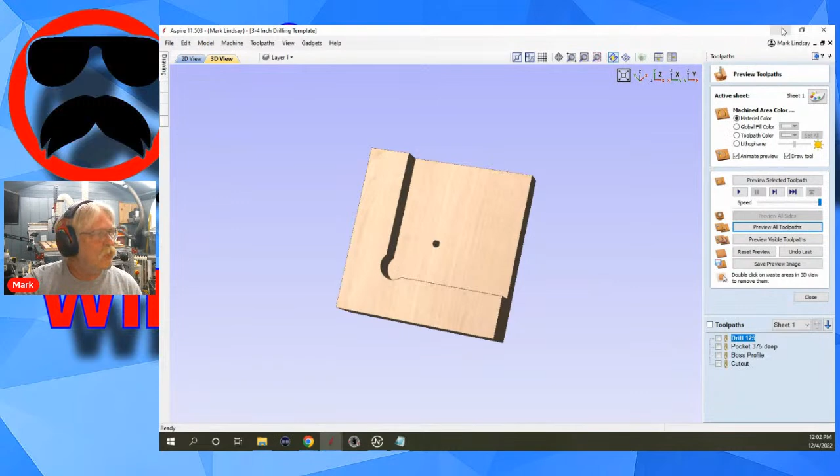It is a total of 4 vectors. So let's go ahead over here into a new session of Aspire, and I based this on the piece of scrap MDF that I had. This is 6 inches by 6 inches, and everything worked out okay. You can use any size that you want. The first thing I'm going to do is create a rectangle for my outside profile, and anchor the center of that at my X and Y zero, which is in the center of the material.

I want square corners, and I'm going to make it 3 inches by 3 inches. I'll go ahead and create that.

Then I'm going to create 2 more rectangles. I'll start it up here at this corner, and just roughly guesstimate the width and bring it down to this bottom edge. I'm going to adjust this - let's make it the width of it, 3/4 of an inch, so 0.75. I'll click apply. I want to anchor that to the bottom left corner right here, and click apply. Then I'm going to draw another rectangle horizontally right here - this is for that little boss that helps me seat this corner jig. I'll do the same thing, anchor it at the same point, and make that 0.75, click apply. Then I'll close that.

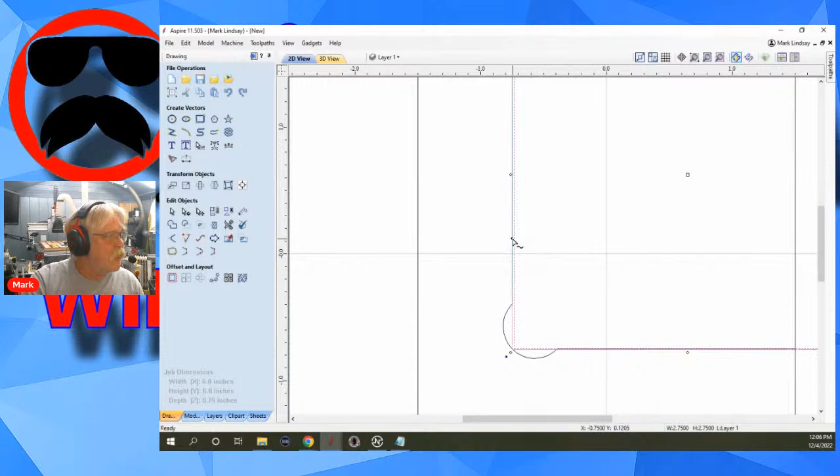Then I need to move it. So we'll go ahead and click it again to go into move and transform mode. And I'm just going to slide it over here so that that's even with that boss. Then I'll come down here, slide it up so it's even with that edge of the boss. I got a little bit off here. Let's scoot it over. There we go. Yeah, let's get real picky. Let's go up right here. There we go. Now we're set.

All right, now I need to draw a guide, a vertical and a horizontal guide, just so I know where to put my 1/8 inch diameter hole. I'm going to drill a hole here, which will be the actual drilling guide hole that you can see right there.

So I'll pull a guide over here and pull a horizontal guide right here. Now, the easiest way I have found to adjust the position of these guides is to right click, and I have a current position of -0.75.

Without doing a lot of math, let's just let the built-in calculators do it. I want this guide to be 3/4 of an inch above that boss. So here on my keyboard, I'll go plus 0.75 equals, that's my new position, it just happens to be 0. Close that, and I'll come over to the vertical guide and do the same thing. Plus 0.75 equals, click apply, close, and now this intersection is 3/4 of an inch above this edge of this boss here, and 3/4 of an inch to the right of this boss here.

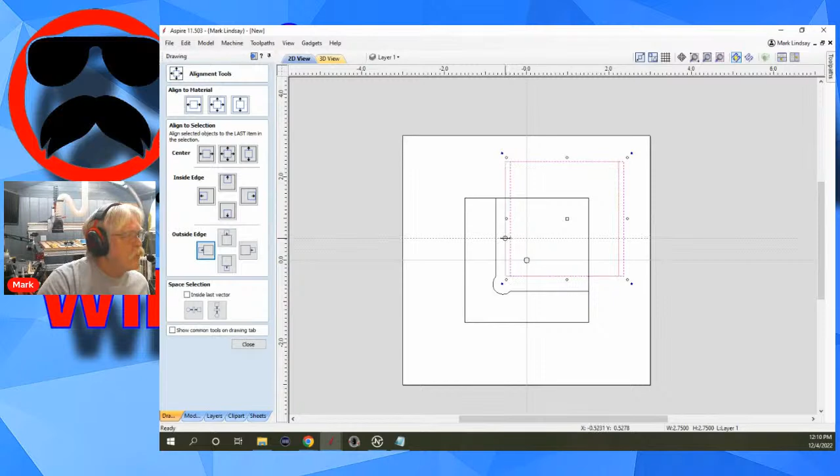Just turn on geometry snapping and it should snap right down if you're careful. Yes, that's going to go to the inside edge. That's why. It's going to come over here to this one. It's not going to come to this one. Well, hey, I tried. Not quick, but accurate. Exactly.

Exactly. Okay, let's go ahead and toolpath this. Now, it's only 4 vectors, but believe it or not, it does require a few different toolpaths here. I'm going to do a drilling toolpath for the 1/8 inch. I'm going to do that one first. I'm going to drill to the thickness of the material.

So I'll just type in Z equals because I don't remember how thick my material is. And I will select the bit. The bit I'm going to use is a 1/8 inch upcut end mill. And there is that. I'm not going to worry about peck drilling. It's a 1/8 inch straight in, straight out, done. Calculate, and there's my first toolpath.

Let's go back in here. Why am I not seeing it? Start depth, yes. Make sure I have the vector selected. Yes, I do. Okay, close. All right, then I'm going to come along and pocket this area out. And it's 3/4 inch material.

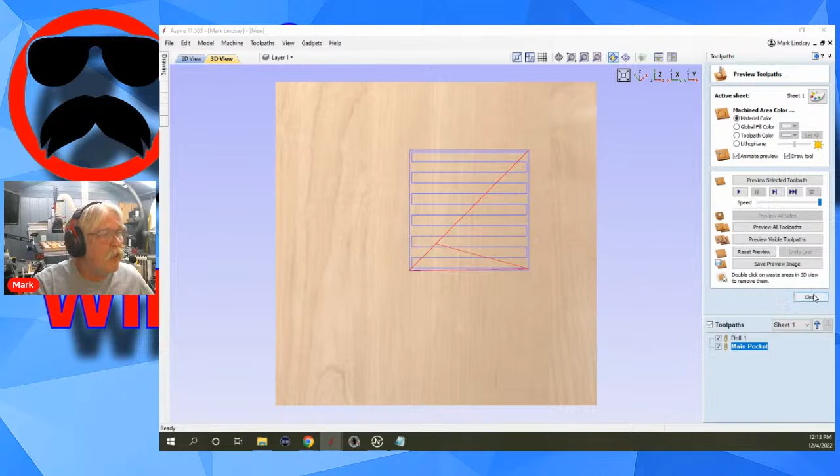Okay. I'll close that, go back over, now I want to do the boss. And this is where I just made a mistake. What I should have done was I should have put that boss on its own layer. So I have it selected now. Let me go ahead and move to layer, new layer. Let's call it boss. This is what I get for trying to hurry through this. I forget steps. And I'll make it blue. Okay. That way I can find the boss and not the outer border. I should have put the pocket on its own layer as well. I'll do that in a second.

I want to do a profile toolpath for this boss. So I just want it to carve around the inside and outside and make sure to get that little fillet in there. So I'll do a profile toolpath. Start depth is 0, but I only want it to carve down to the area this pocket has taken out. So that's 3/8 of an inch. So I will do 0.375. I'll use my 1/2 inch end mill again. Select and want to cut to the outside. I don't need to do a separate last pass. I'm not going to add tabs, but I am going to add a smooth ramp over a distance of an inch.

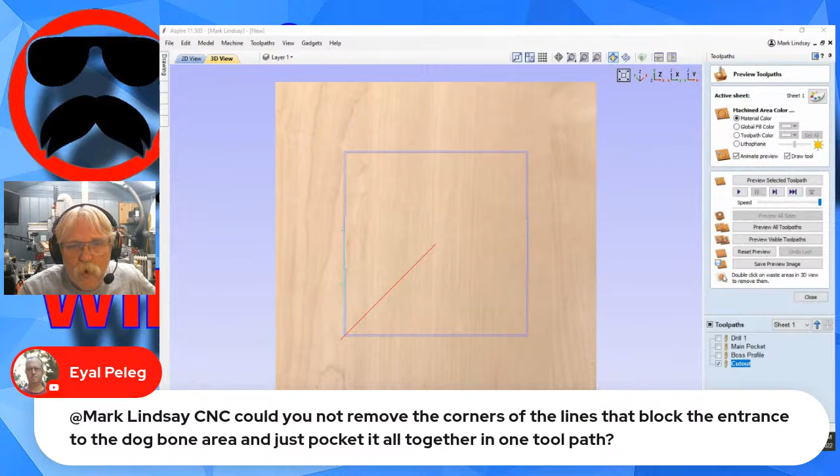Let's see here. Eyal says, could you not remove the corners of the lines that block the entrance to the dog bone area and just pocket it all together in one tool path? Probably could. Probably could. Sure. There's more than one way to skin the proverbial cat. So however you want to do it, go right ahead. This is just the way I did it.

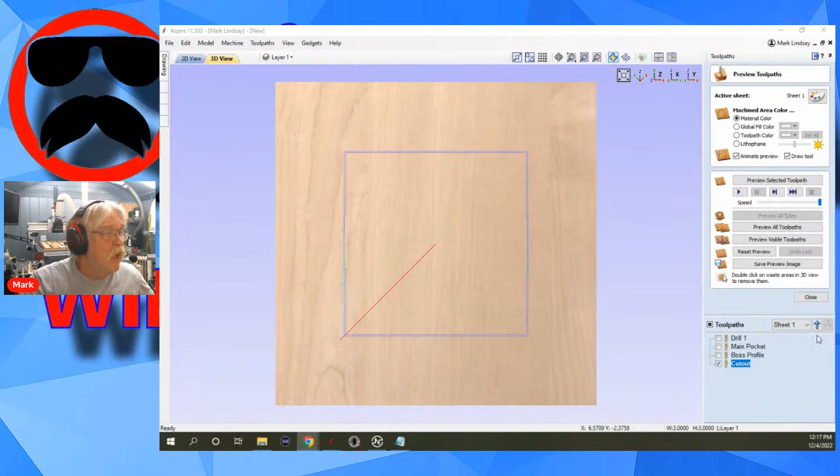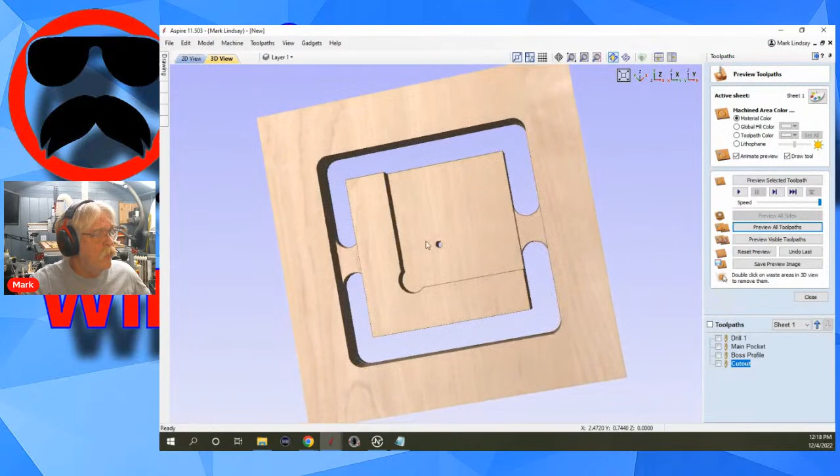So now we'll uncheck that, and I'm going to preview all of the tool paths. And there is the finished product. That's how I would cut it, machine it, and get the whole thing done. That's how I did cut it, machine it, and got the whole thing done. Without the tabs, it ends up looking like so. And here's the fun part about this. That just took me 18 minutes to explain everything, and it took less time than this. This says it's going to take 1 minute 10 seconds to cut. The actual machining time for this, not counting tool changes, was 55 seconds.

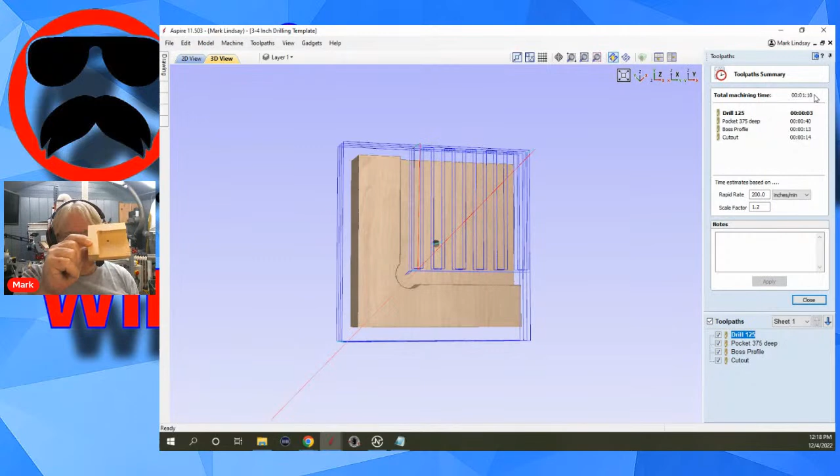Yeah, you could do this with a handheld router. Yeah, you could cut it on the table saw, but it is very quick, very easy. It took me longer to tell you how to do it than it did to actually do it. It's just one of those things. And I marked it. This is 3/4. I could make another one for 1/2 inch, put it in my jig drawer. And then when I need something, there it is. It's ready and raring to go.

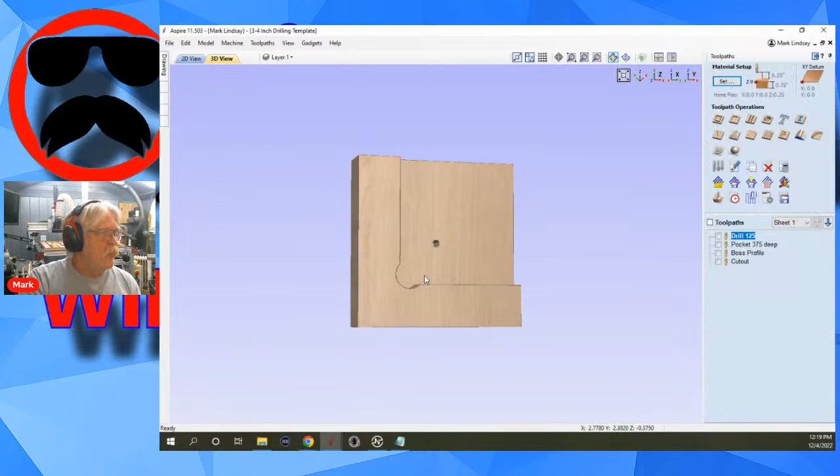So just a quick little easy project that you could do. If you have a large piece of MDF like this one, you could probably do 3 or 4 of them. Just lay out a bunch of them for different spacings.

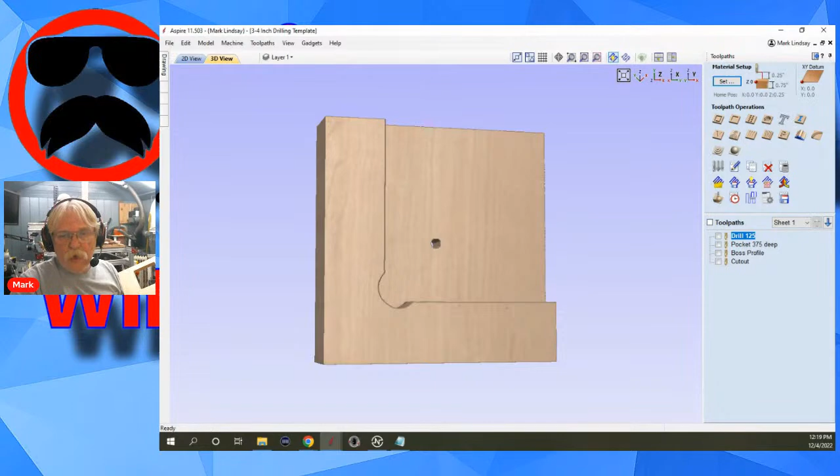Then when I need to use it, let me stop sharing here. When I need to use it, all I do is I take this side with that boss there, throw it right up against the corner like so, and start drilling. Put a drill stop on my drill bit, and then I go to the correct depth. Quick, easy little template, and ba-boom.

Eyal says you can make several holes in the same one. Yes, that's true. But I find that eventually these holes will start to wear. And if you get them too close together, like for instance, if you went 3/4 of an inch, then a 1/2 inch, remember the diameter of your hole, you're going to have two holes real close together. The probability is they're going to break through into one another.

So, for 55 seconds of cutting time, you can throw on a larger piece of scrap and cut 3 or 4 of them out for different distances if you wanted. And if you really wanted to get tricky, drill a hole out here and put them all on a chain or piece of twine or a zip tie for that matter. Just throw them all in the drawer. Then when you need one, you got them all together.

Templates and jigs are real easy to make. They're actually, I'll be honest, pretty satisfying simply because you get a lot of instant gratification out of it. Like I said, 55 seconds of work. There's no finishing involved. And when this thing wears out or the hole gets too big or what have you, make another one. So, that was an experiment in attempting to design something really fast live. And I'm glad it didn't go totally south.

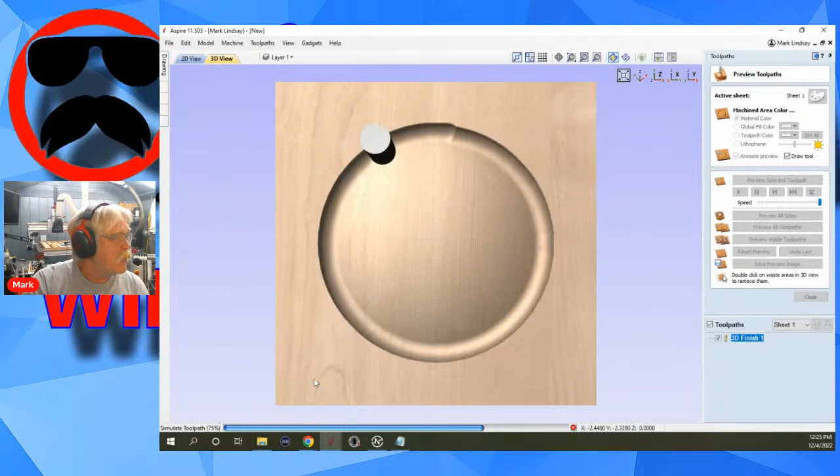When it comes time to actually do the text, okay, you'll do a V-carve toolpath, and I'm not going to use a flat depth. I will select a 60-degree V-bit. No, I won't either. I don't have one installed, and I don't want to take the time to install it. Let's use a 90-degree V-bit.

The thing to remember when you get down here: project the toolpath onto 3D model. That's the important part. If you don't put a check mark here, what VCarve is going to do is just air cut that text and not get all of it. Whatever happens to touch the top of the model is what'll touch the top of the model. But by putting a check mark there, you don't have to go with a start depth. You don't have to do anything. It knows to project this text down onto the shape of the 3D model.

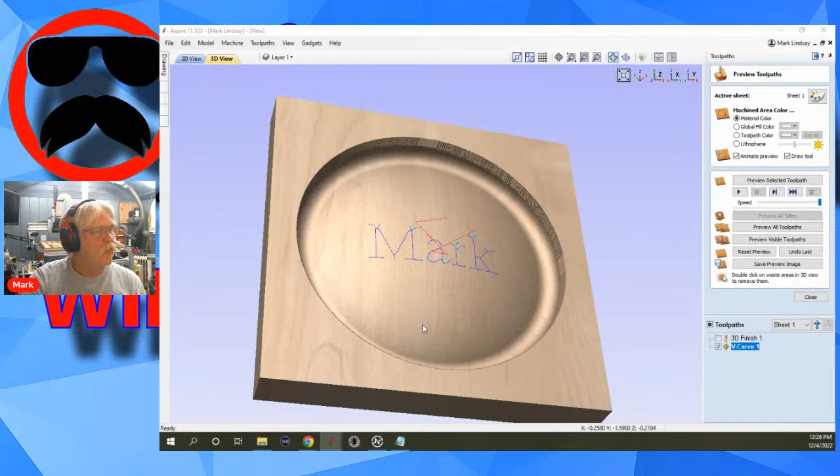So we'll click calculate, and we can see right here that that text toolpath is following the shape of that dome. So back out a little bit and we'll preview it, and there it is. So that's the important part right there, is that little check mark in project toolpath onto 3D model will make or break your project.

So, alrighty, and I hope that answered your question. Okay, it looks like I did answer your question. Okay, terrific, terrific. All right, let's see here. We had a couple of others. Michael Kelsey says, thank you for doing these. You're welcome. Thank you for joining us.

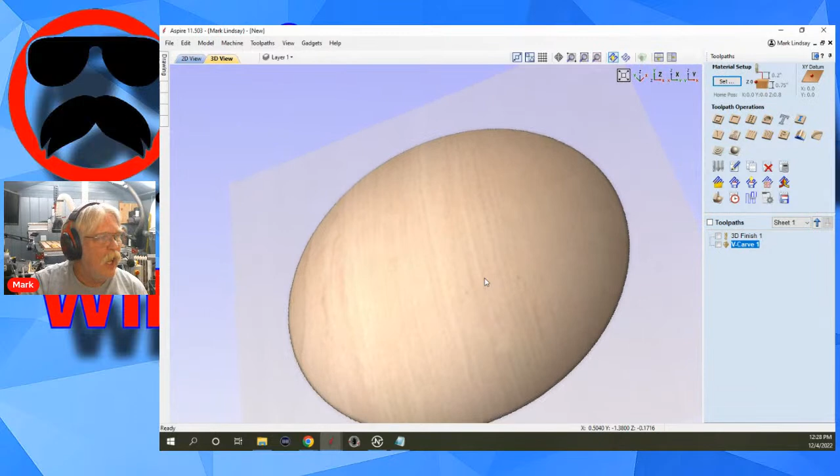When I calculate toolpaths for text in VCarve Pro 10.5, I often get paths with the bit moving back and forth across the work. How can I make the toolpath more efficient? Well, let me go back over here and just say that efficiency is in the eye of the beholder. And a lot of times, what looks like an inefficient toolpath to us isn't to the control system.

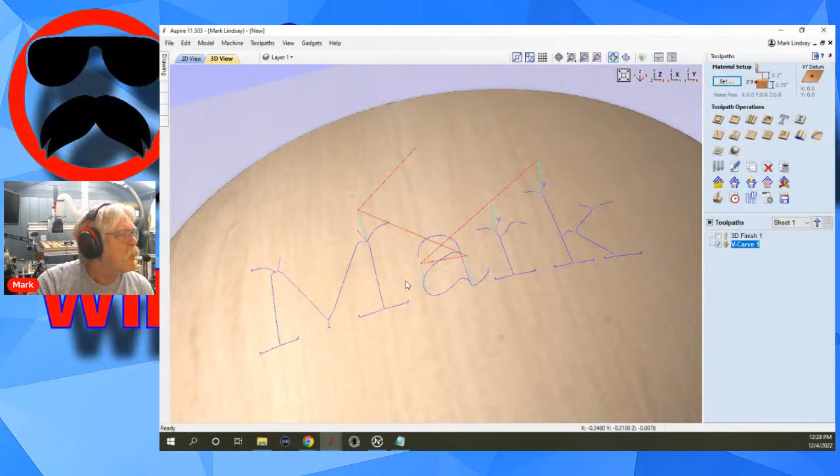Now, I know this is very simple, but if you look at the red lines here on the toolpath, and remember the key, red is a rapid move, dark blue is the actual cut, light blue is a plunge, and green is a retract. Okay. So this is going to come from the Z0 position, move over here, plunge down. It's going to cut the M, then lift up, come over and cut this part, lift up, and then move over, cut the R, then lift up, move over, and cut the K.

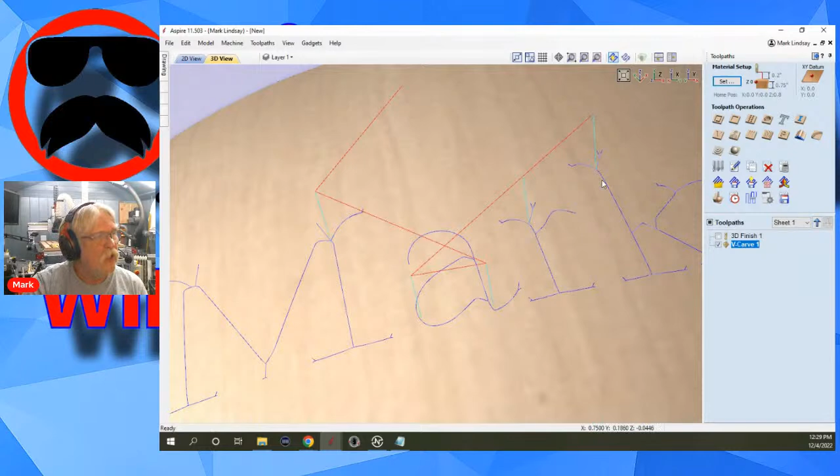That may look inefficient to us, but the post processor and the computer take into account where the bit is in X and in Y. So while we may think it would be more efficient for the CNC to start down here close to the XY0, if you happen to have it in the bottom left corner, and then run all the way across, then lift up and run all the way back over, that can actually take more time.

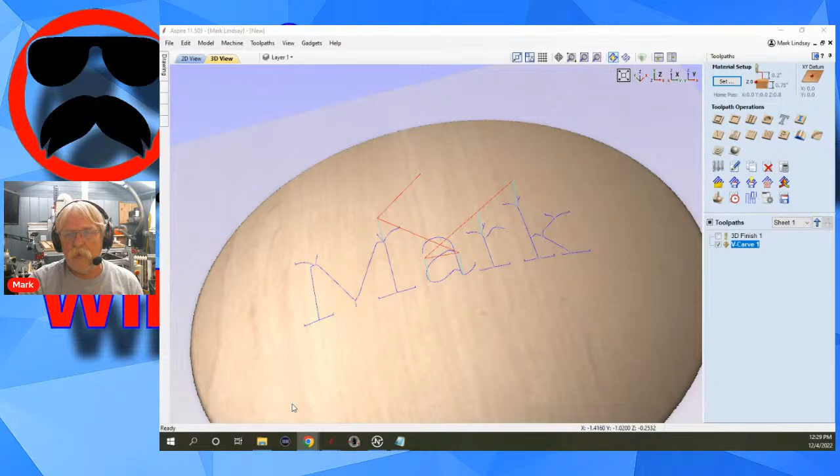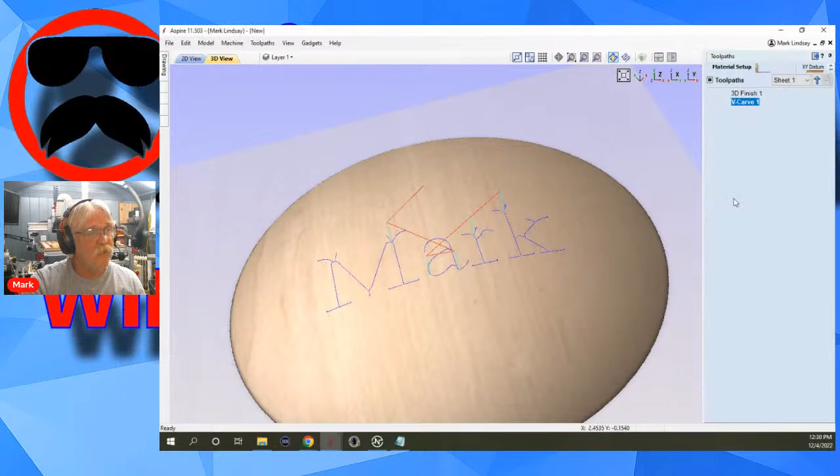I did a video on this a little over a year ago, may have been over 2 years ago, because I had this discussion with a couple of people, and I ran the same toolpath several different ways with several lines of text. And I found that, like this one here is going to take 32 seconds, changing the vector selection order to what I thought was more efficient was actually less efficient. And the difference, however, was we're talking fractions of a second.

Now, I was using like 5 lines of text, and when I would calculate the toolpath and do the toolpath summary, they were maybe 1 second difference. And usually the toolpath that the computer came up with was the most efficient one. Now, again, I did a video on this a couple years back. I will go find that video and I'll link it down in the description of this video as soon as we're done here, and you can see my results.

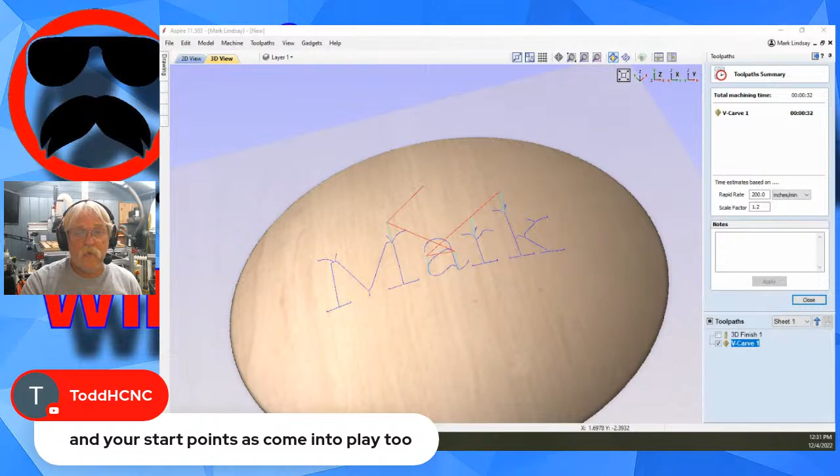Now, ToddHCNC makes an excellent point in that your start points come into play too. You're absolutely right about that. And what he means by start points is, let's go back into the 2D view and uncheck the toolpath here. Select this, and I believe to go into node editing, yeah, I'm going to have to convert it to curves. If we look at the start points, and remember on letters like this, A, for instance, the reason you had 2 separate start and stop points was because you have an inside cut as well as an outside cut.

So the start points, they enter into it as well. There's nothing really, I wouldn't say anything really wrong with this. I mean, from the R to the K, you might be able to right click and make that a start point. But when your machine is rapiding over, does the distance from here to here really make a lot of difference in machining time from here to here? You know what I mean? We're talking a fraction of a second here.

You can go in and you can edit, you can create your own vector selection order, but I didn't find any benefit. The main reason to use a vector selection order, in my experience, has been to make sure if you have vectors that need to be cut before other vectors, because you're worried about interference or something like that, then that's a reason to use that.